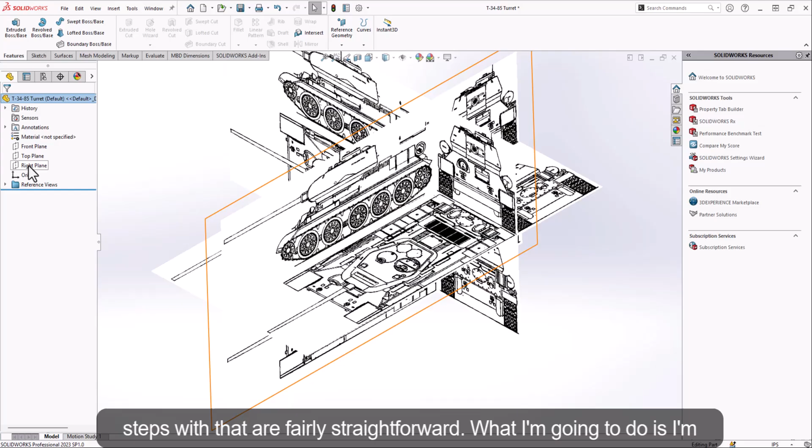Okay, so I said I'm going to talk about something different, and that is true. What I'm going to talk about now is kind of planning out how we're going to do our surface modeling to replicate this turret. So the steps with that are fairly straightforward. What I'm going to do is create a bunch of reference sketches on these views to kind of plan out what's important with respect to the geometry.

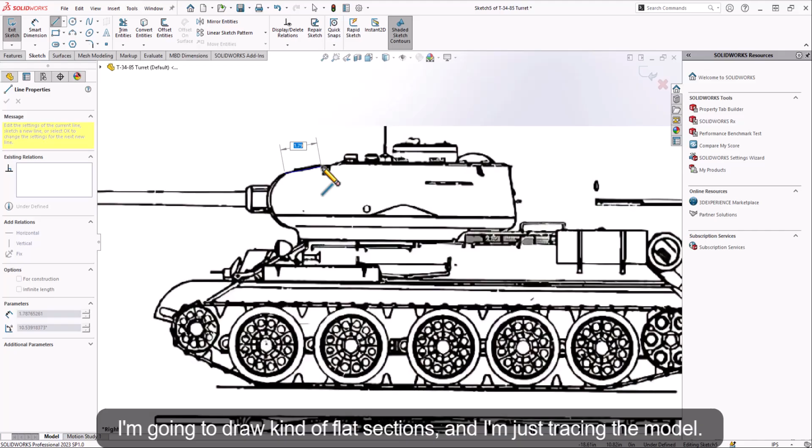So from the side view, the side profile is obviously important because that's kind of the midplane of the model, which I'll show how to do in a minute. So first, I'm going to take lines, I'm going to draw kind of the flat sections, and I'm just tracing the model. And you can see here, it's got this kind of fillet. That is something that looks pretty consistent, but I'm still going to model.

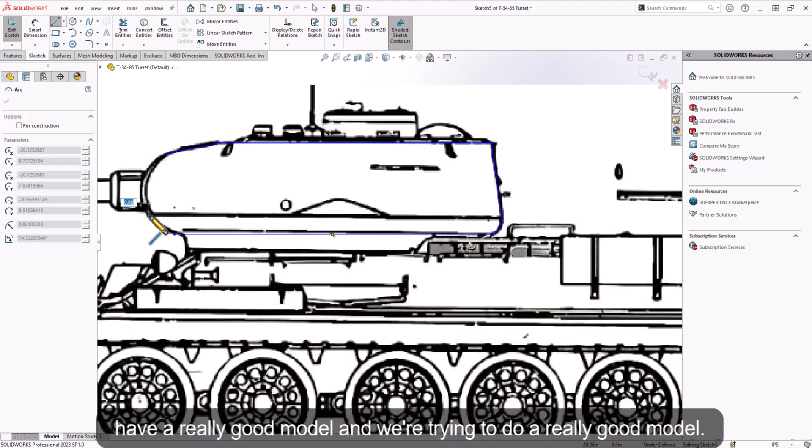So I'm going to go to tangent arc, because it is tangent right here, and I'm going to draw it down, and it's just tracing roughly. Everything's pretty rough. I know that the whole idea is that you have a really good model, and we're trying to do a really good model, but we're also trying to do it in an efficient way. So I draw just the rough outline, and then I'm going to take these points and manipulate them, and try to replicate.

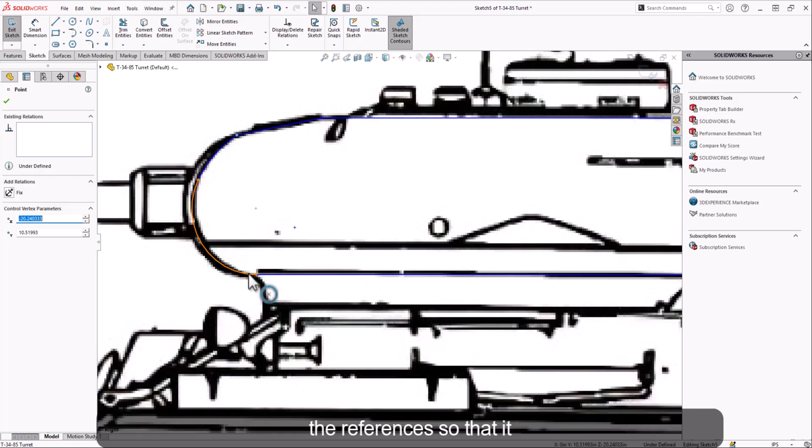And actually, that's part of the gun's shield, so I want to go to this inner line. So I'm going to just manipulate these arcs and get them lined up with the references so that it approximates that curvature. And then I'm going to do a fillet here, just because it should be smooth, and there's some degree of what should it be versus what does the picture exactly show.

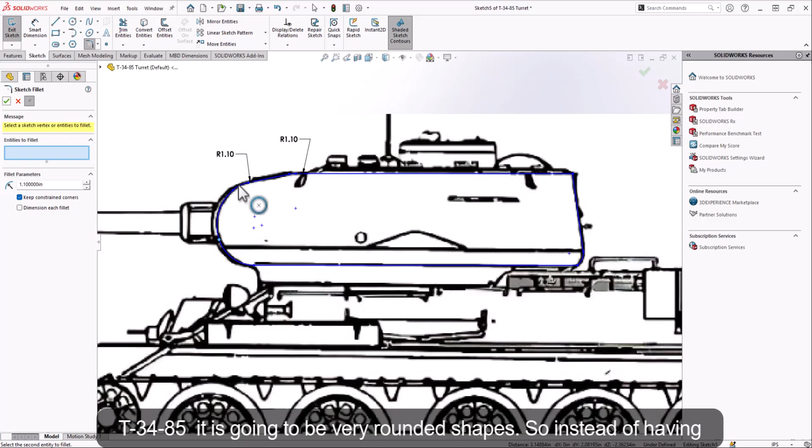So we know that the T-34 has a very rounded shape, so instead of having the flat or very tight seams, I'm going to do a fillet to round them off. So for the side view, this is what that looks like. It's just an outline of the side of the turret. And we know that that is the center of the turret.

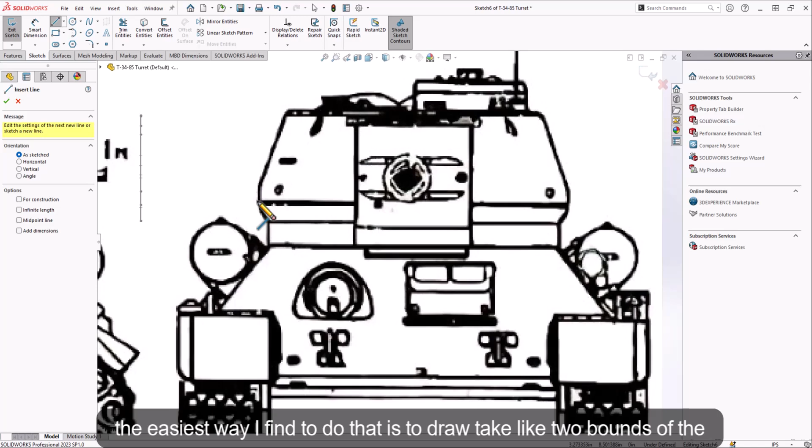So now I'm going to go to the front view. So exit that first sketch and go to the front view. And I want to get the center line. The easiest way I find to do that is to take two bounds of the geometry. We can see the gun's not perfectly aligned with the center of the vehicle. So I create this line that goes between the two ends of the turret, and I'm going to fix those, which is not good practice for engineering work, but I'm going to do it anyway.

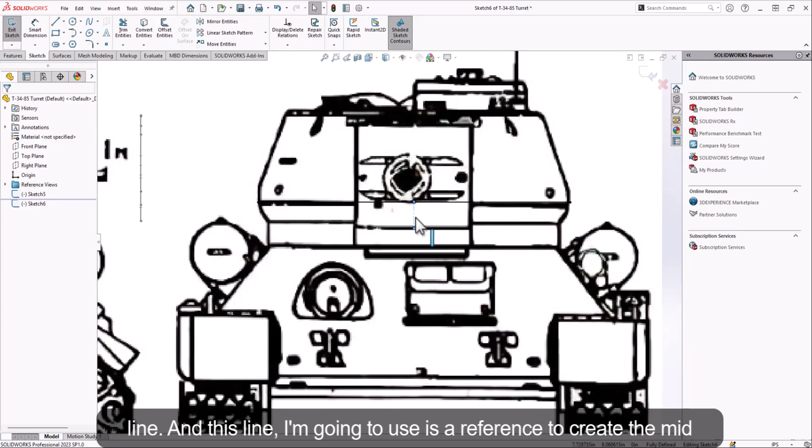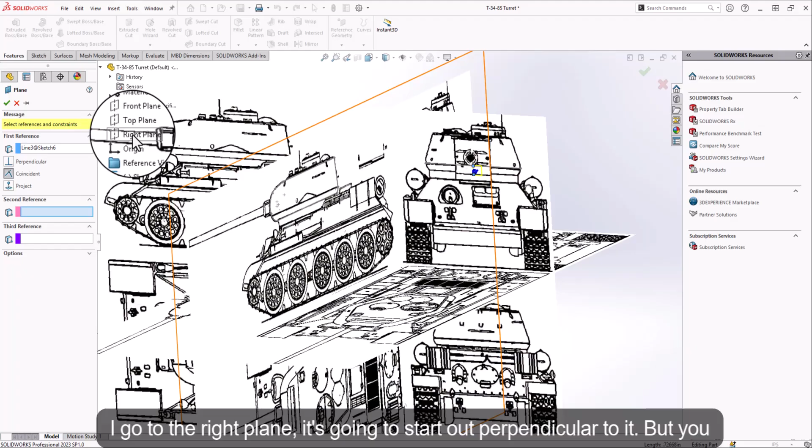And then I'm going to create a vertical line, and this line I'm going to use as a reference to create the midplane of the turret. So I'm going to exit this sketch, go to Features, Reference Geometry, hit Plane, and then I can click this vertical line, because that's one of the constraints that's going to hold my plane in place. And then I'm going to click on the side plane, so the front plane is what I'm going to end up clicking on, but if I go to the right plane, it's going to start out perpendicular to it, but you can change the type of constraint to be parallel and it will work.

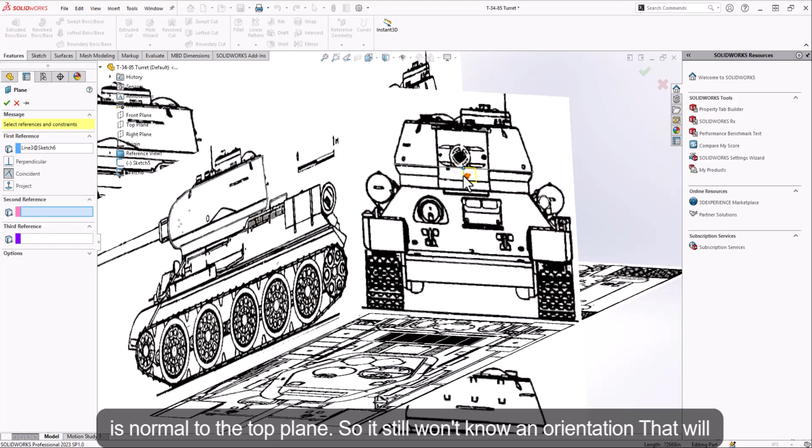Or I can select the front plane, which is going to be parallel to it, so it's going to go in the direction that I want right out the gate. I cannot click on the top plane, because that's not enough information to actually define the plane, because this is normal to the top plane, so it still won't know an orientation. So if I click on front plane, it will create a plane that is in the center of the vehicle, like I want it to be.

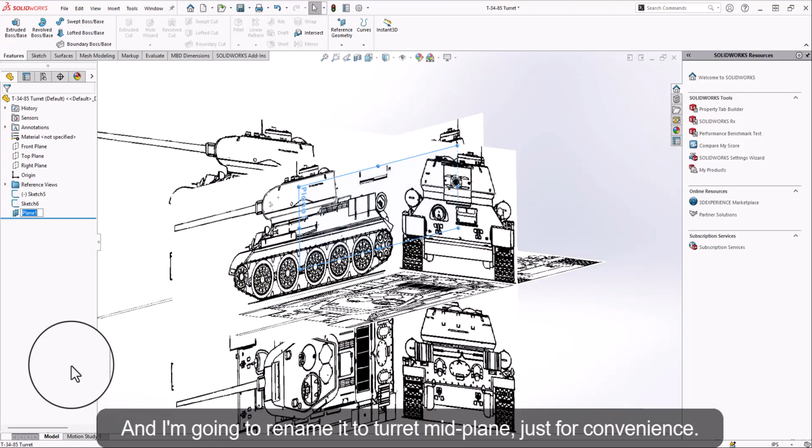I'm going to click the green check mark to commit that, and then I'm going to extend this just so that it's covering the full range that I want, and I'm going to rename it to turret midplane just for convenience.

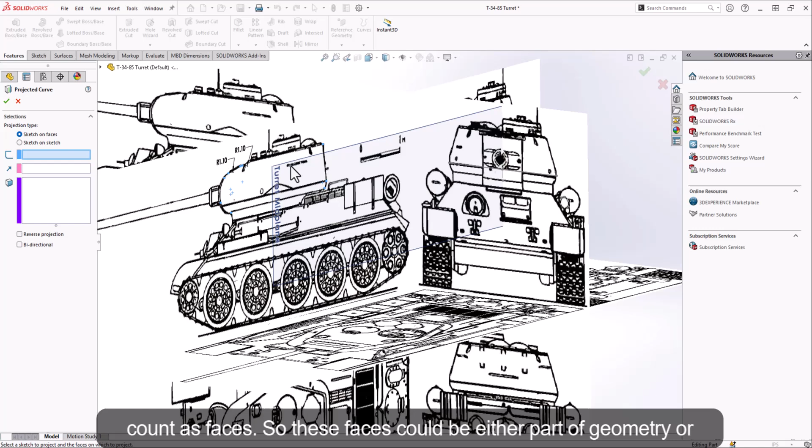Now, I could have done this sketch directly on this turret midplane, but I didn't. And that's not a big deal, because this is just reference, it doesn't have to extrude or anything, so I can take this sketch, and I can go to Curves, Project Curve, and then I can do a sketch on a face, and the planes count as faces. So these faces can be either part of geometry, or they can be reference planes.

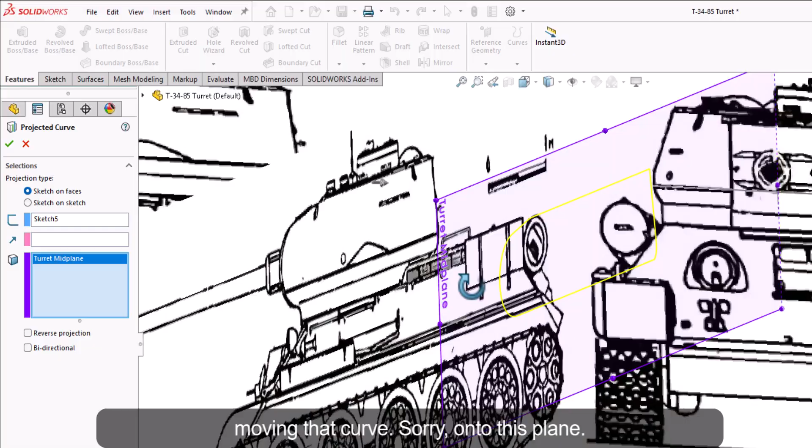So for the sketch, I'm going to project it from this sketch. This is the direction that it's projecting. Since it's projecting normal to the sketch plane, I don't need to do anything here, that's the default. And then this is the plane that I project onto. And you can see now it's moving that curve onto this plane. So I'm going to commit that, and that gives me one reference that I'm going to hold when I create the model. So right now I'm just planning out the model.

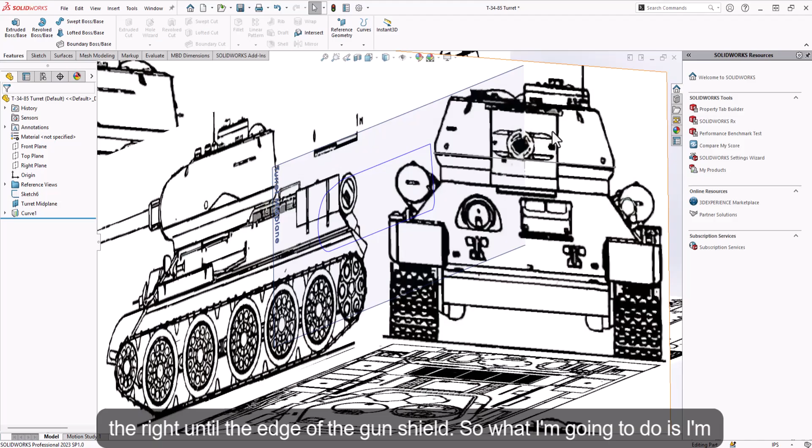And we know that this front curve is fairly consistent, or not just fairly, it's flat. It's going to extrude essentially to the right until the edge of the gun shield. So I'm going to go to front plane, and I'm going to set up another constraint that is at the edge of the gun shield. I'm going to say this edge, so I'm going to create another plane. So this is a lot of planes and references just to create a structure that I'm going to be using. And I'm not going to name this one. It can get a little bogged down, but I'm just going to hide it when I'm done with it.

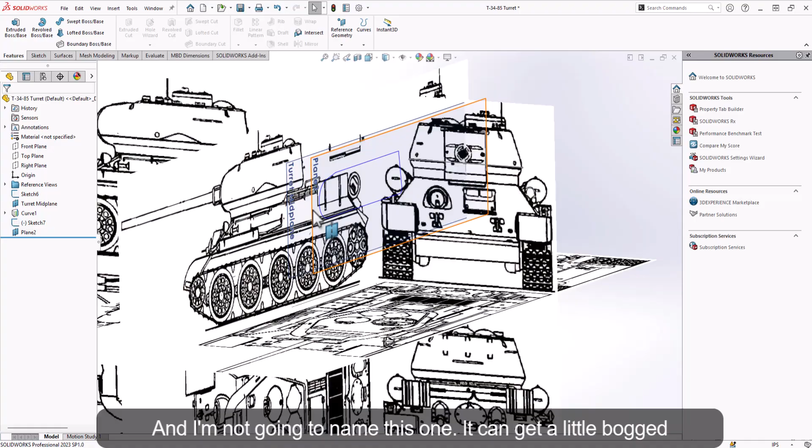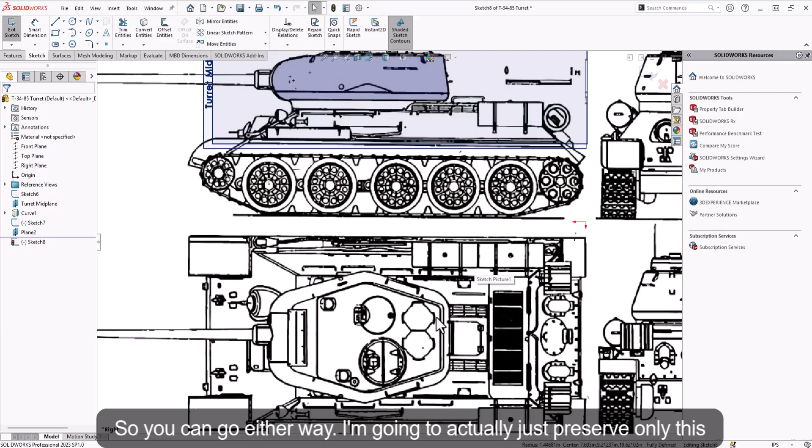But I know that this curvature is going to be on this plane as well. So I'm going to go to Sketch, and I'm just going to select the curve that's relevant. I'm going to convert it, and that's going to convert the entire turret, but we know that this back part, it looks like it actually does follow that. So you can go either way. I'm going to actually just preserve only this front piece for generality, because sometimes the turret could be rounded in the back, and you don't want this.

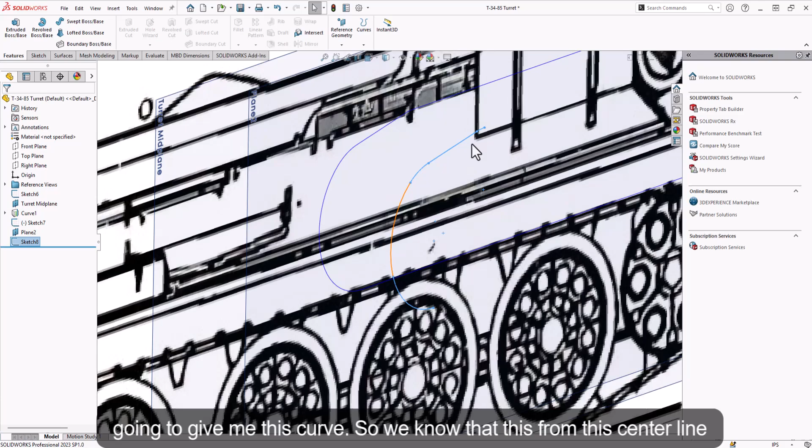If you do this, you're going to get a flat jump between the two references, and that's not what you want. So I'm going to delete those, but I'm going to keep this front curvature preserved, and I'm using the power trim again. So that's just going to be one reference, and that's going to give me this curve. So we know that from this center line curve to this curve, it's going to just be a flat extrude. So we'll deal with that later, but we're going to get that reference.

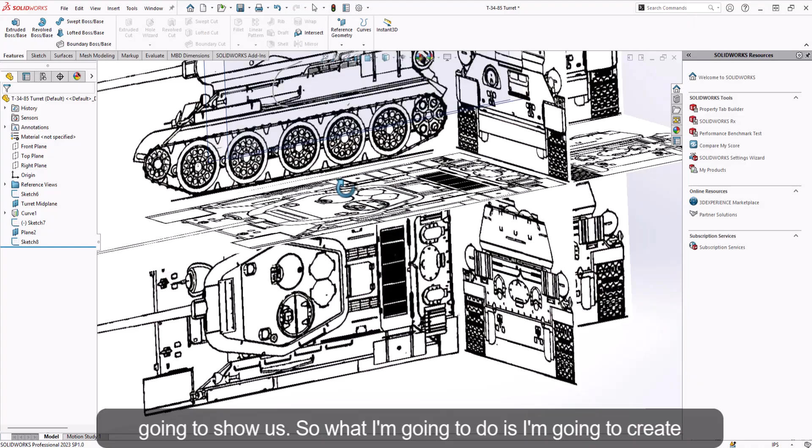And then it's convenient that these plans have this horizontal line here, because that shows the outer bound. You can see where the turret's at its widest, and that's where the top view is going to show us. So I'm going to create another reference plane. I'm going to hide this plane 2 because I don't need it anymore. I'm not deleting it because I'd get rid of anything that's derived from it, but I'm hiding it.

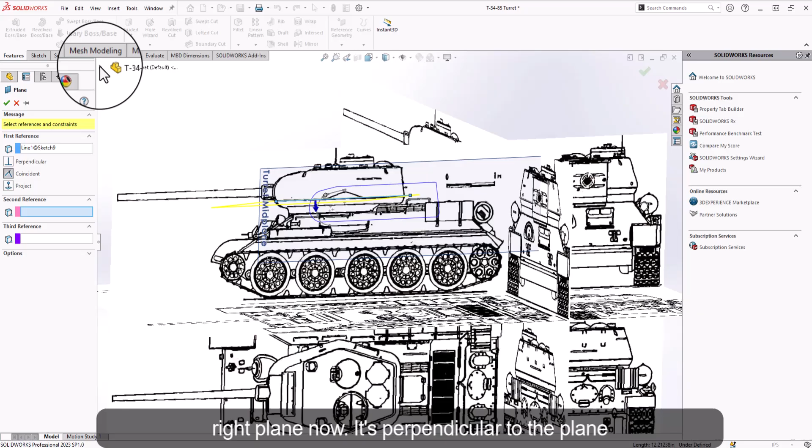And then I'm going to draw this horizontal line for the side view where it's at the widest point of the turret. And I'm going to create a reference plane from that. And I'm going to use the right plane now because it's perpendicular to the plane that I want. And then I'm going to create that. And this is going to be perpendicular to the first several references I did, which is good because if you don't have perpendicular references, you're going to have a very blocky structure.

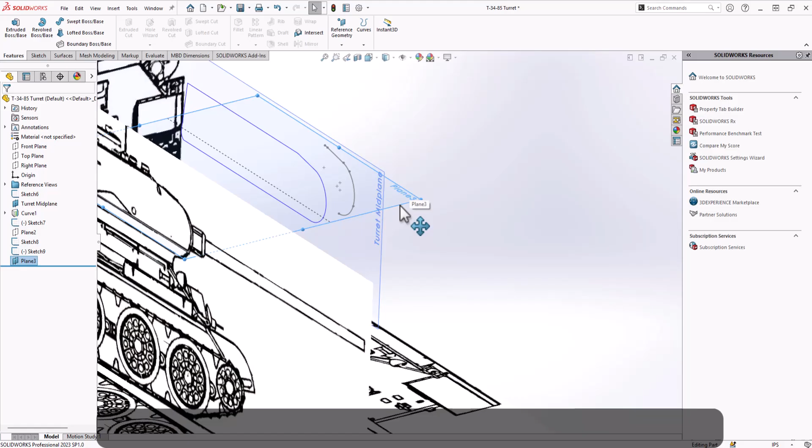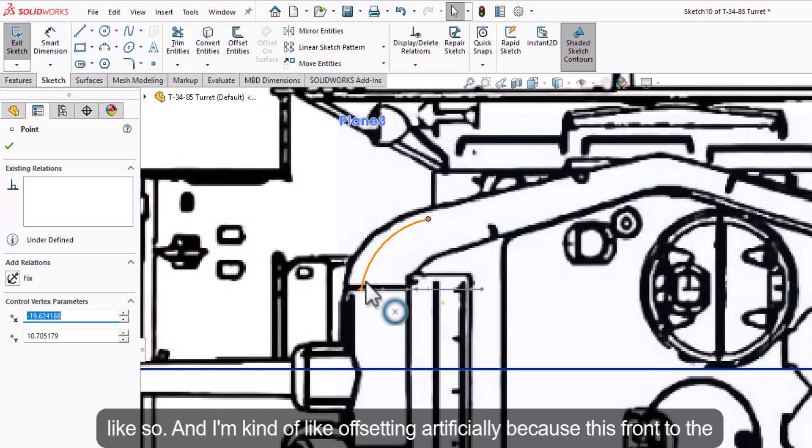So now I'm going to click here, click the sketch, and then I'm going to trace out from here. You can see it's not perfectly aligned, so it's going to be a little rough, but I'm going to trace out the rough shape of the model. So first we have an arc that starts around here, and it goes like so. And I'm offsetting artificially because this front of the turret should be offset. So actually what I'll do is I'll take this sketch and I'll just shift it down so I have a better reference. And I'll go back to editing this.

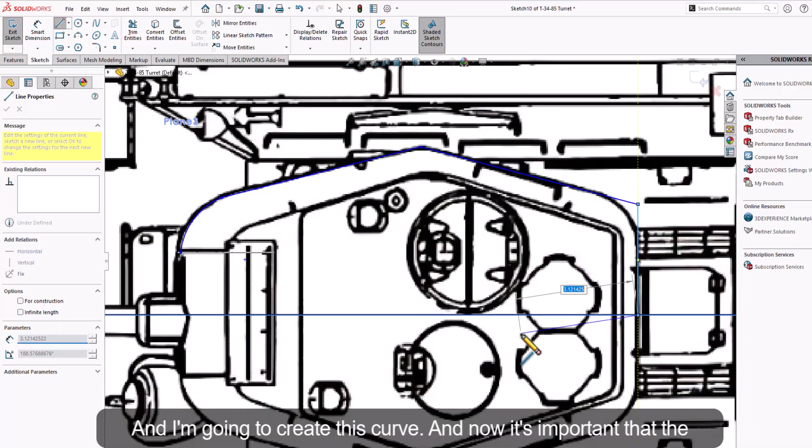And I'm just tracing out the curvature of the turret. Again, fairly roughly, but I'm just tracing it. I'm going to use a fillet in the back there because it looks like a pretty constant radius. And I'm going to create this curve. And now it's important that the curves all align with your other references. So I'm going to say that this front here has to pierce. So what pierce does is you take a point from one sketch, and if you pierce it with another curve, it's going to make sure that point lies along that curve if it can intersect.

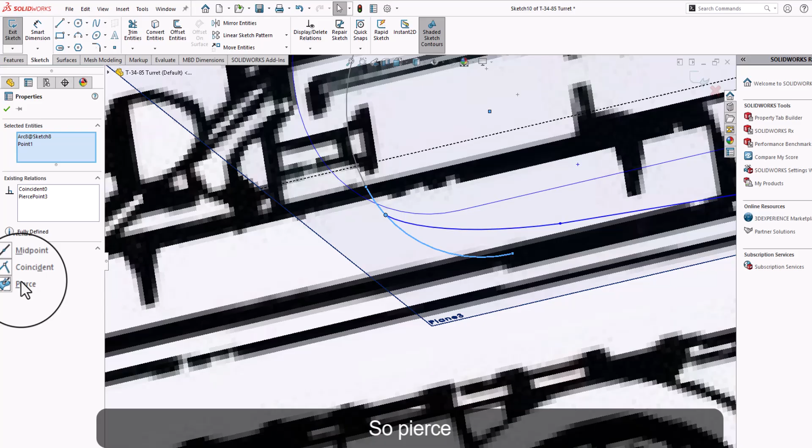If it can't, it won't work. So pierce, and it's going to move this line to this sketch, or this curve. And I'm going to do the same in the back here. Pierce, just so they line up, because if they don't, it's going to be harder to do the surface features. And you can see this needs to, well actually no, that is okay. That was okay. So this is going to be edited.

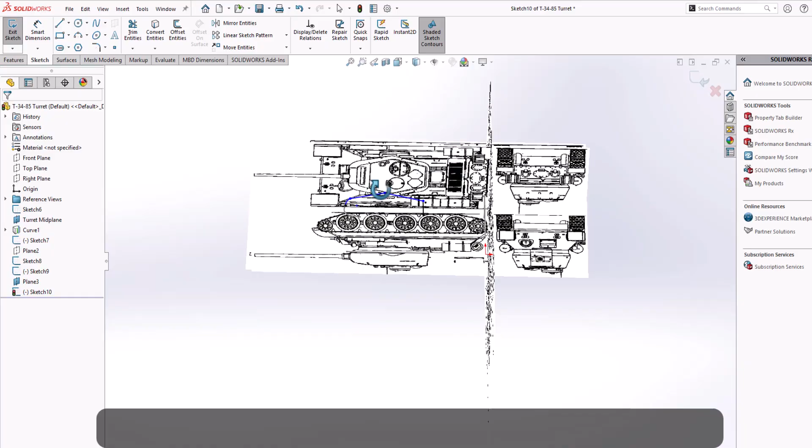And it moves you to the bottom view. I'm going to go to the top. It doesn't matter, it's kind of preference. And I'm going to make sure that this straight line is parallel to this straight line and ends at roughly the same position. And you can see that it's not an exact science. It's kind of getting things roughly aligned where you want them.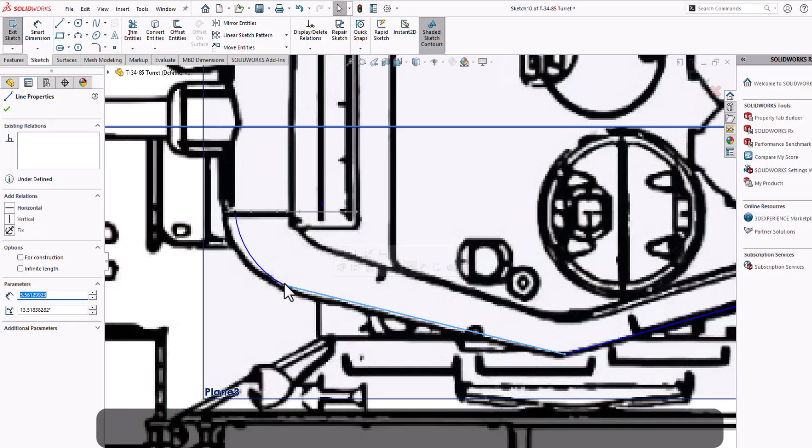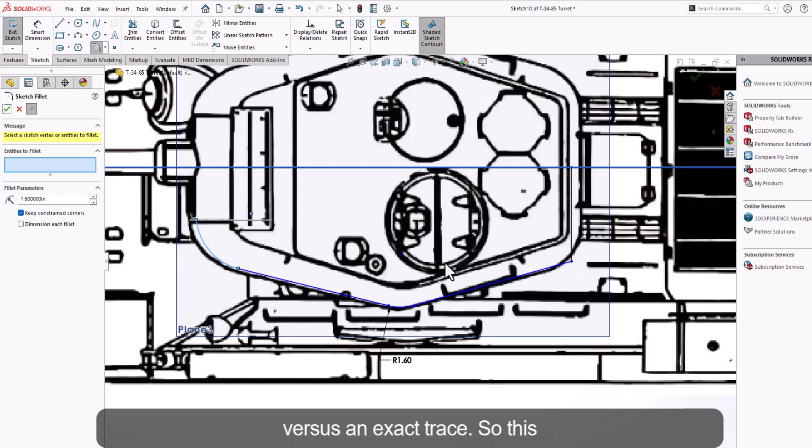Ideally, it would be more exact, but a lot of the times the plans you're using aren't perfect. So it's just getting the rough behavior. Like you can see here, the turret is longer than it is in the side view, and that doesn't make any sense. But it's how this is depicted. So you kind of have to do some extrapolation and figure out exactly how it should look versus an exact trace. So this, in hindsight, isn't the best reference to be using, but it will give me the rough shape of the turret, which is what really matters for these models.

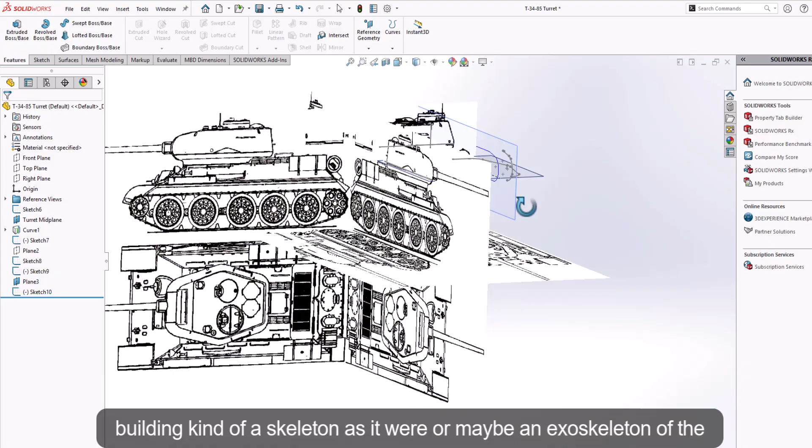So now I've got this sort of curve that represents the top perspective, and you can see I'm building kind of a skeleton, as it were, or maybe an exoskeleton of the turret's shape, which is what you want to get started. And here we have the limitation that we can't see through this turret, so we can't see what the curve down here looks like, so we kind of have to guess on that, and we'll do that later. But for now, we can see the top of the turret.

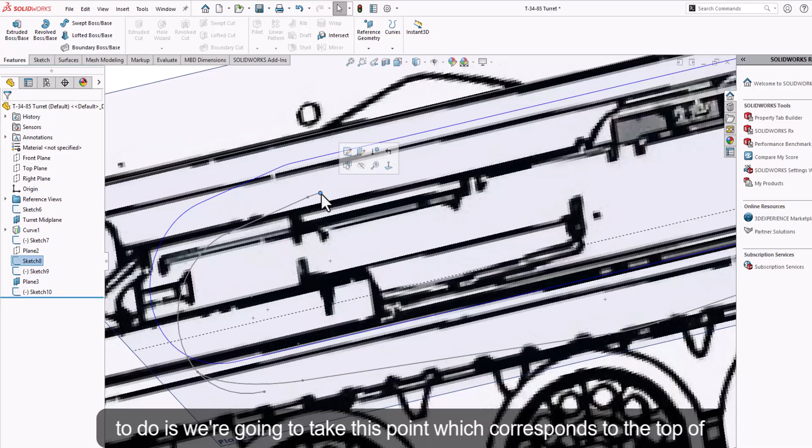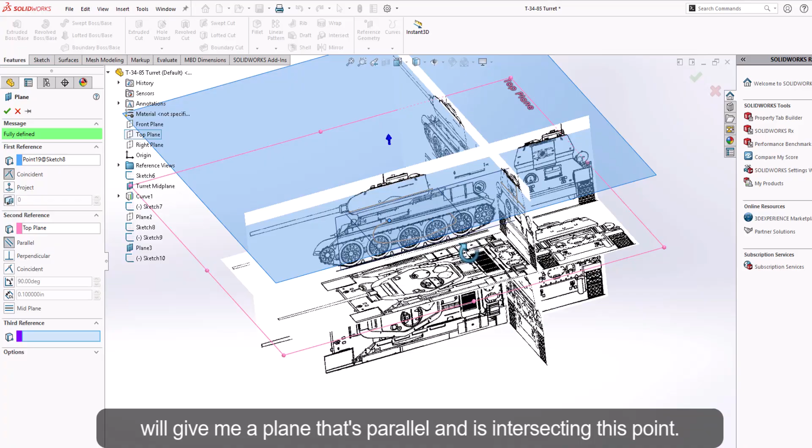So what we're going to do is take this point, which corresponds to the top of the turret. We're going to create a plane, and now we want to use the top plane, because the top plane is going to be parallel to the top of the turret. The plane intersects this point and is parallel to this top plane. So if I select in this drop down, I can select the top plane, and it will give me a plane that's parallel and is intersecting this point.

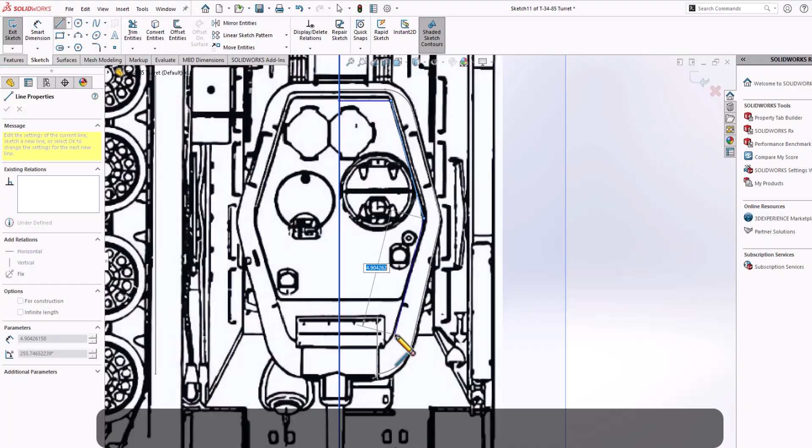And what I'll do is I'll hide this plane because it's not helping anymore, and I'm going to create my reference for the top of the turret. And this kind of arcs downward. That will be captured later, but what I'm going to do is draw from around here, and I'm going to draw out this shape very roughly. And I'm going to start out with just part of it.

We know that this point is this point. They're the same point, so we select, Control, select, and it says that we can't make them the same point, and that's because they're on perpendicular planes. But what I can do is select this edge, select this point, and pierce. And that will get that.

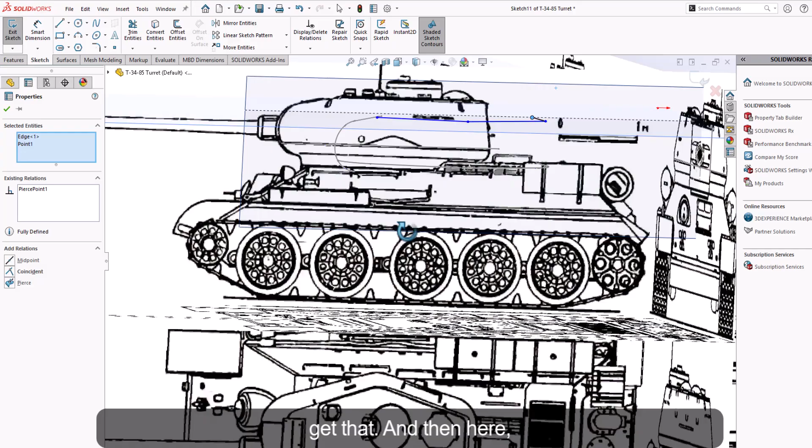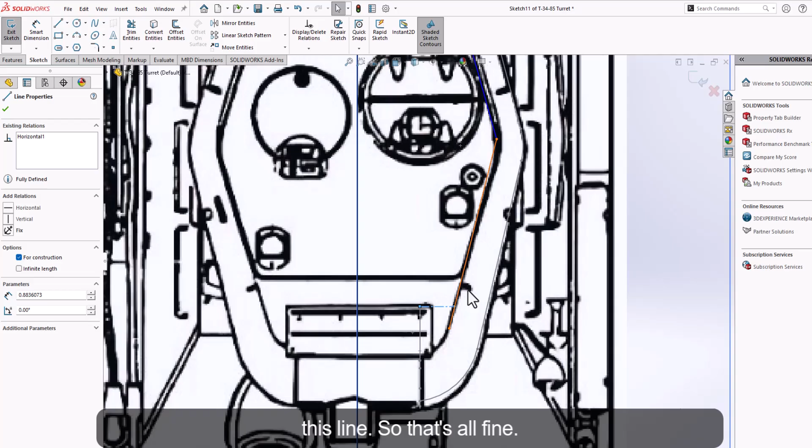And then here, I'm going to create a reference line, because this should correspond. So it's going to meet this point. It's going to be horizontal, horizontal being with respect to this view here. Sometimes camera management is a little janky, and it's probably a little jarring for the viewer. It corresponds to this line, so that's all fine. This doesn't need to extend past there for now.

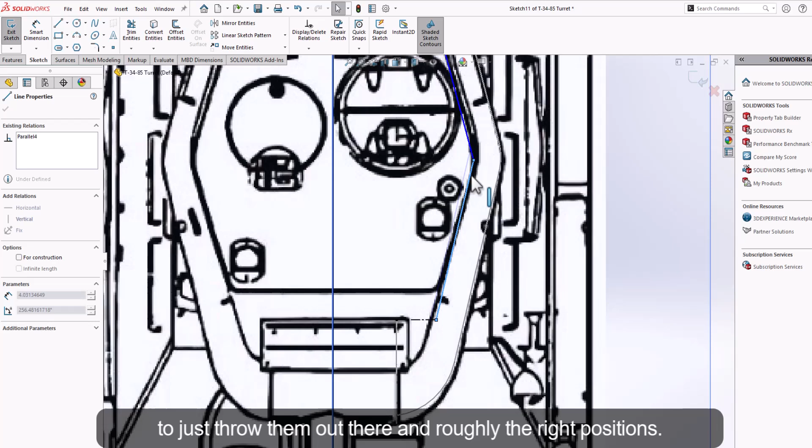And you can see that these two lines are parallel. So you don't want to trace this top line. Ideally they'd be the same, but what you really want to do is make it parallel to this line, like so. And the same for this to this. And then we're going to just draw them out until they're in roughly the right positions, like so. And then we're going to do our fillets to kind of clean it up.

This fillet, since it's got a lower, it should have a smaller radius. So I'm going to shrink the radius down. And there's a lot of eyeballing, which I know isn't the most satisfying. Like, oh, why can't I just do it perfectly?

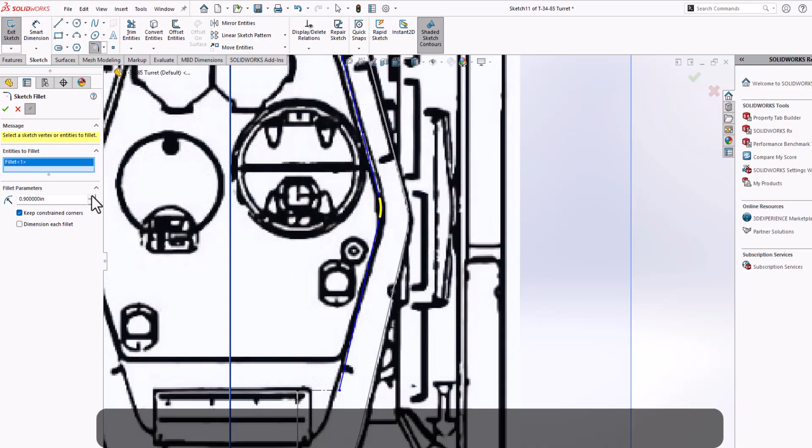But it gets good effects. Like, it'll look fine. It's just a matter of getting as close to the reference material as you can. But the reference materials are just drawings, so they might not actually be geometrically possible. And 3D CAD does need to be geometrically possible.

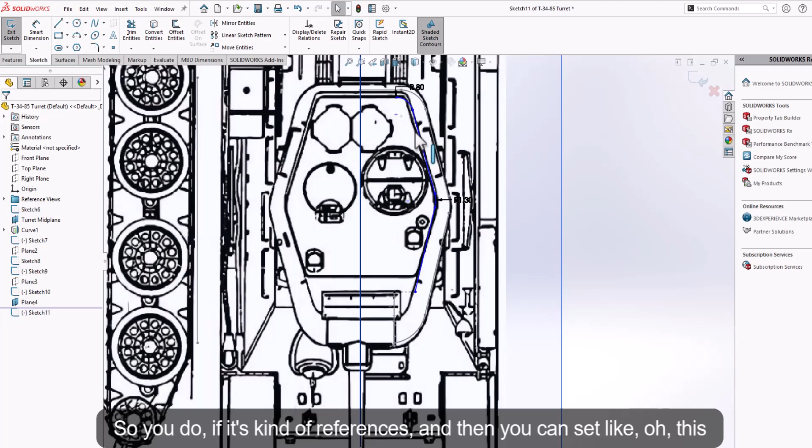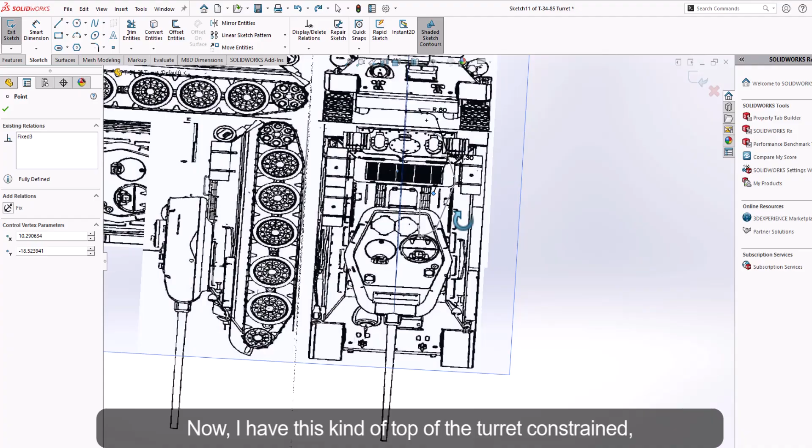So you do this kind of references, and then you can say, oh, this point looks pretty exact, so I'm going to fix it, and that's going to fix the derived points. And that over-constrains it, so I don't want to do that. So what that means is, if you fix this, it doesn't change the geometry, so that's why it doesn't go red, but it goes yellow, meaning you didn't need to do that. We already know where it is. But I will fix this point. So now I have the top of the turret constrained, which is all well and good.

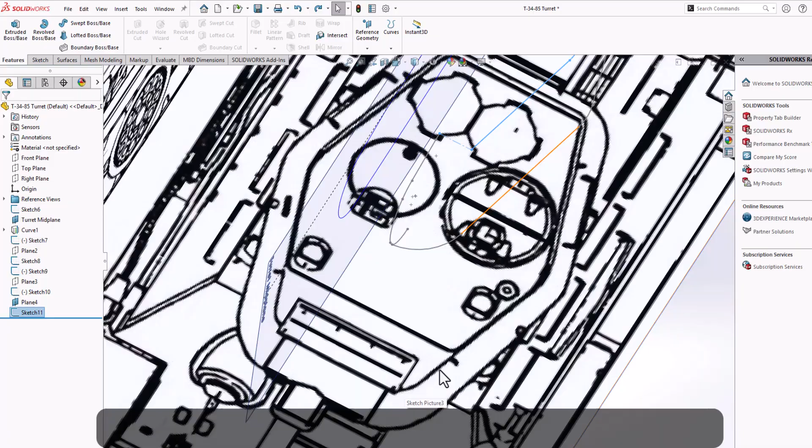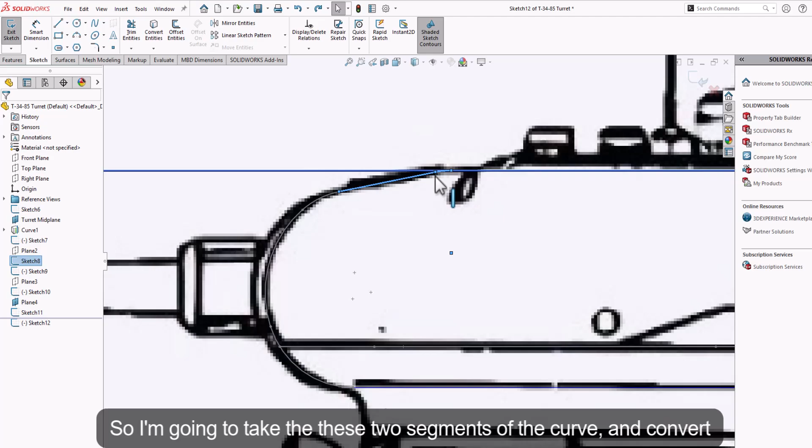And then I'm going to constrain more things. So we know that this downward shape here is going to be like this curve. This is a little bit more involved, but I'm going to go back to plane 2, which is the plane that this sketch is on, and I'm going to trace out, because you've got to get a curve that's intersecting two curves. So I'm going to take these two segments of the curve and convert them. So now I've got this reference, which is the same as I already had, so it seems kind of pointless.

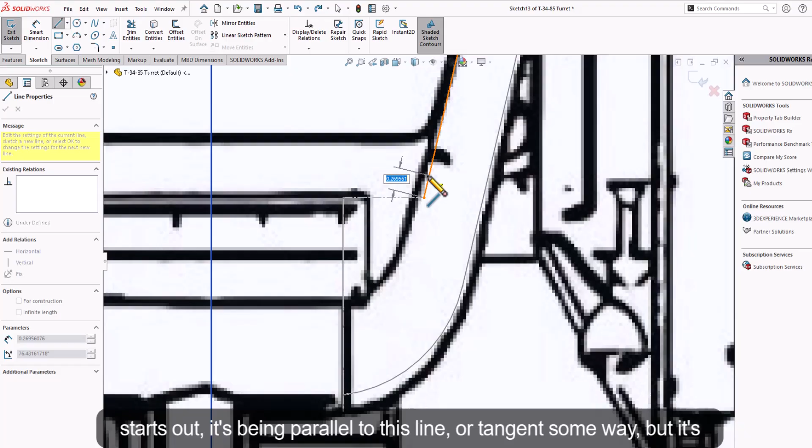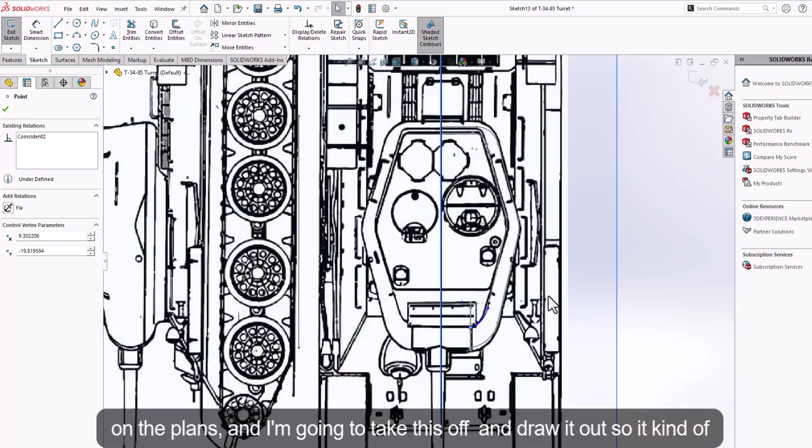But now I'm going to take my top plane, or you could do this top plane for the top of the turret, it won't matter. I'm going to select that and draw on it. I'm going to draw a line that starts out being parallel to this line, and it curves over, like so. I'm going to set that to be parallel. And here, you can see it looks a little weird, and that roughly corresponds to this point here. Suffice to say, this curve represents this curve on the plans, and I'm going to draw it out so it has the same curvature. And this is all very approximate.

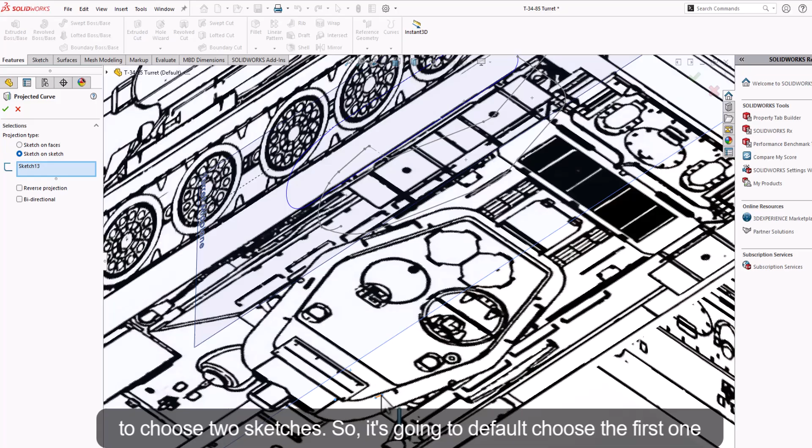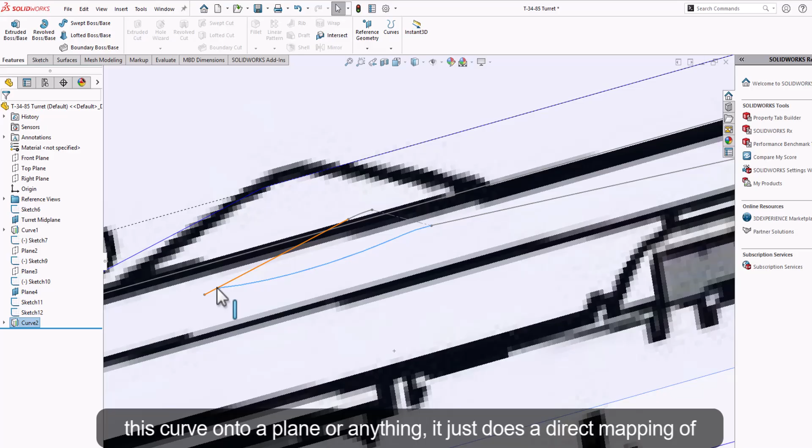Now I have two curves that are on perpendicular planes, and I can go back to my curves, project, and now I'm going to do sketch on sketch. That lets me choose two sketches. It defaults to the first one that I already had selected, and then I choose the second one that I created. And you can see it projects this out, and it projects this out, and it draws the points where they meet each other. So it creates this 3D curve, which is what I want. It's not trying to map this curve onto a plane or anything. It just does a direct mapping of curve to curve, which is what we want.

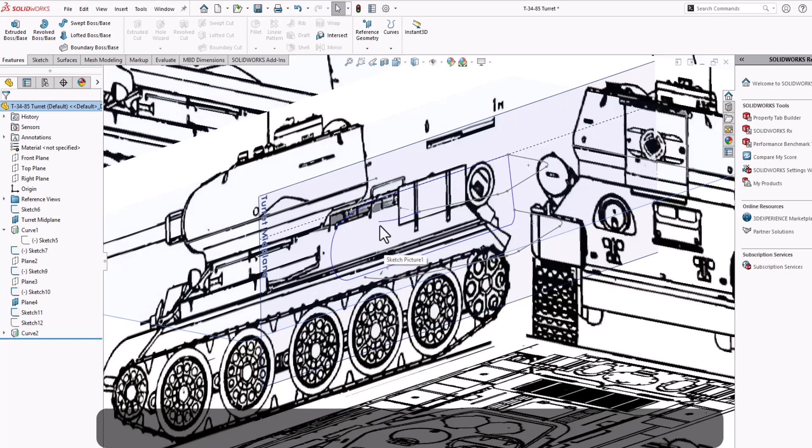So I'll take that, and then I hide this. So that's just another piece of reference that we've got. One of these sketches appears to be missing, and that's because I'm looking at the wrong thing, because it's the curve, not the sketch. Now I want this point and this point to connect. So I'm going to click on those two points, create a plane, and now that I have two points, I have to do a parallel constraint, so I'm going to choose the front plane. So now I've got this, and this here is going to have this side curve.

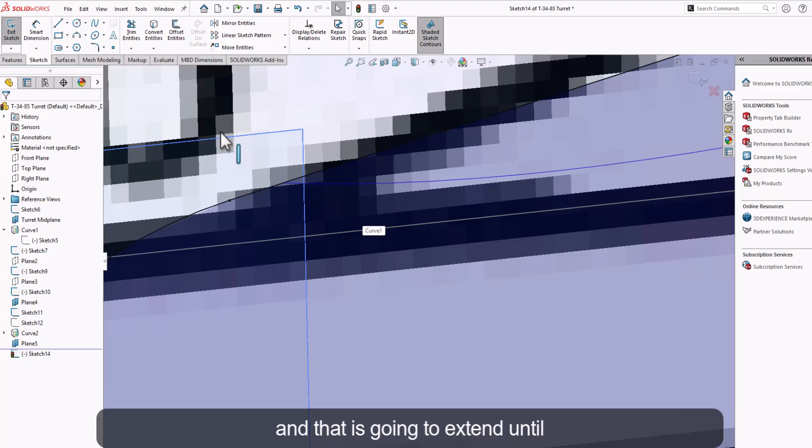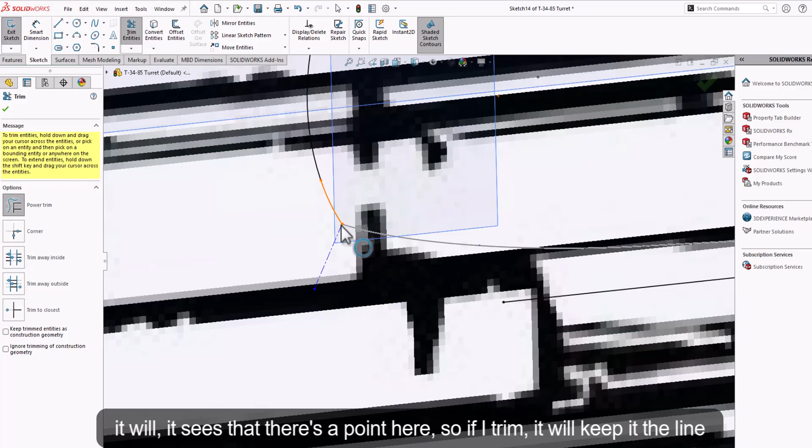So I'm going to convert that, and that is going to extend until this point. So I'm going to use a reference center line to set the constraint. It can go in any direction, and this intersects or pierces this side curve. And the same happens down here. So I'm using the center line to set an end point, not to define an axis or anything. And then if I go to trim, it sees that there's a point here, so if I trim, it will keep the line up until that point. And I do the same up here.

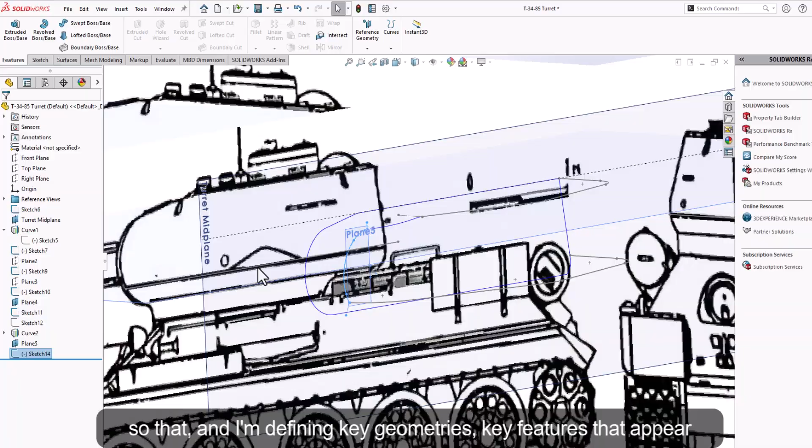So now I have this curve, and you can see I'm building that skeleton. It's a little much to look at, but I'm just creating these constraints, and I'm defining key geometry, key features that appear on the plans that I'm looking at. And here, it's pretty straight, it looks almost like a loft, so I don't have to do anything back here. So this front is where I have to do most of the work. And now that I have all these, I think I am ready to start filling out the surfaces.